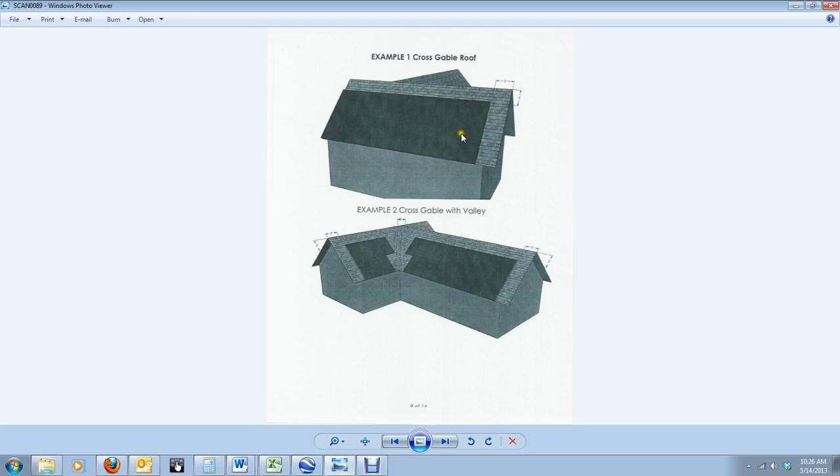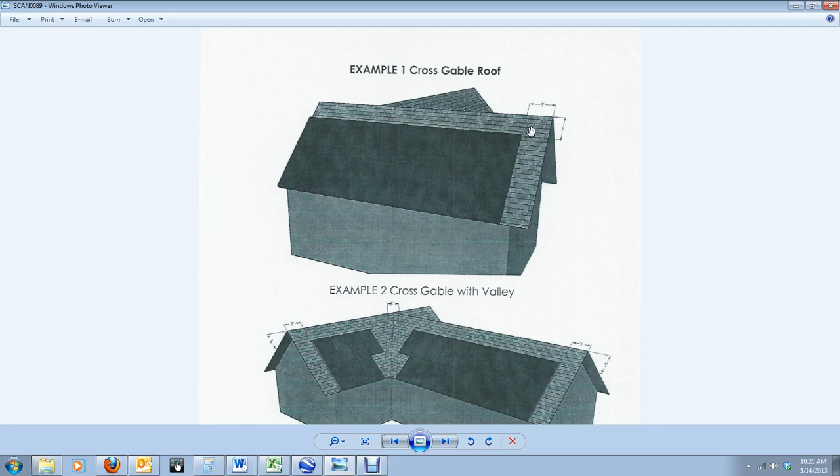My next step is to make sure that I'm not in a city that has fire code. I know from experience that Temecula enforces fire code. So fire code issues have to do with being able to place modules in a certain area. So fire code for particular roofs looks like this. So if you were to do a cross gable roof, we need to stay 3 feet away from the ridge and 3 feet away from the eave line. On a cross gable valley roof, I need to stay 3 feet total from this valley.

So if I go back to Google Earth, this roof right here, I need to stay 3 feet from the ridge, and I need to stay 3 feet from one of these eaves. So I need to deduct 3 feet from my ridge number and 3 feet from my eave number. So I'm going to go back to this sheet, and I did this on purpose so that you could see that there was 39 modules that I could have placed on this roof, and if I didn't look into the fire code issue, I would have oversized the system and eventually ended up re-signing this homeowner.

So I'm going to deduct 3 feet from that. I'm also going to take 3 feet from this number. So now I'm at 43 feet times 14. So 43 times 14 equals 602. I'm going to go 602, and I'm going to divide that by 20. So now I'm at 30 modules. So if I would have not done my homework, I would have actually placed 9 more modules on that roof, and it would have never fit. And it would have never passed plan check, and eventually would have never got installed on the roof. So 30 modules on that west facing roof.

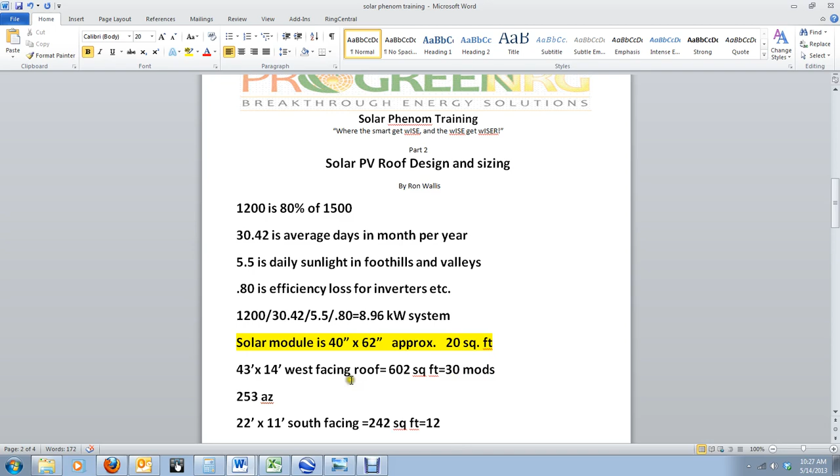Now I'm going to go to the other roof, and I'm going to actually take 3 feet off that number. I'm going to take 1.5 feet off this number right here, because I need to be 3 feet total and not in the valley with my solar modules. So 1.5 feet this way on this roof and 1.5 feet this way. So 4.5 feet there, 3 feet over here, so minus 4.5 feet going this way and minus 3 feet this way.

So I'm going to go back to my sheet and I'm going to say this needs to be 22 minus 4.5 feet is 17.5. And this from my ridge down to my eave was minus 3, so that's 8. So now I'm back to my calculator. So it's 17.5 times 8 equals 140. So I just took 100 square feet off.

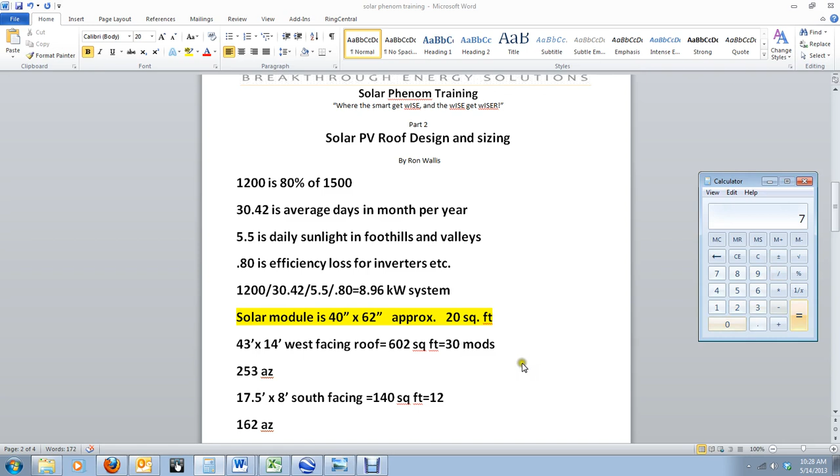So 140 divided by 20. So now I went from 12 modules to 7. So I can fit a total of 30 on the west facing roof, 7 on the south facing roof. So I'm at a total of 37 modules times 250 watt modules. 37 times 250, I'm at a 9.25 system.

9.25 system. I'm over the 8.96, which is what I figured out that I needed to offset their utility bill by 80%. So this looks good. I can fit 30 modules on the west facing roof, 7 on the south facing roof, for a total of 37 modules, 250 watts for a 9.25 kW system.

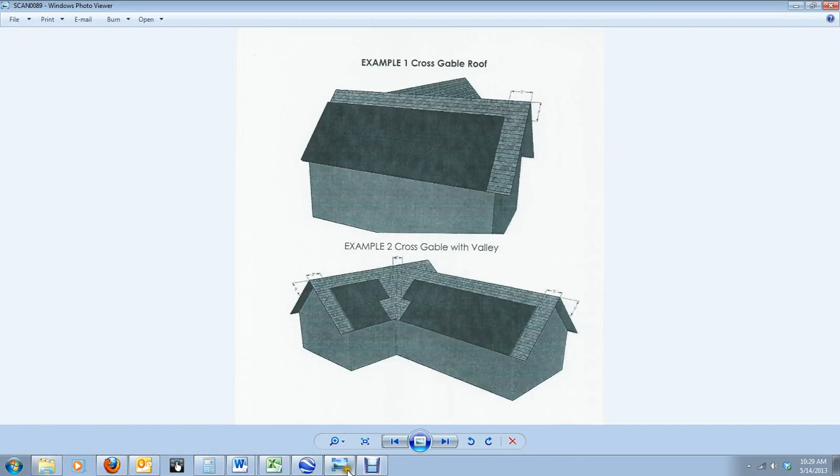My next step is to figure out what my tilt is. And a tilt is what the angle and the degree of the roof is. Can I figure that out through Google Earth? Absolutely not. But I know that 90% of the houses in California either have a 4/12 pitch roof or a 5/12 pitch roof, which is either 18 degrees or 22 degrees.

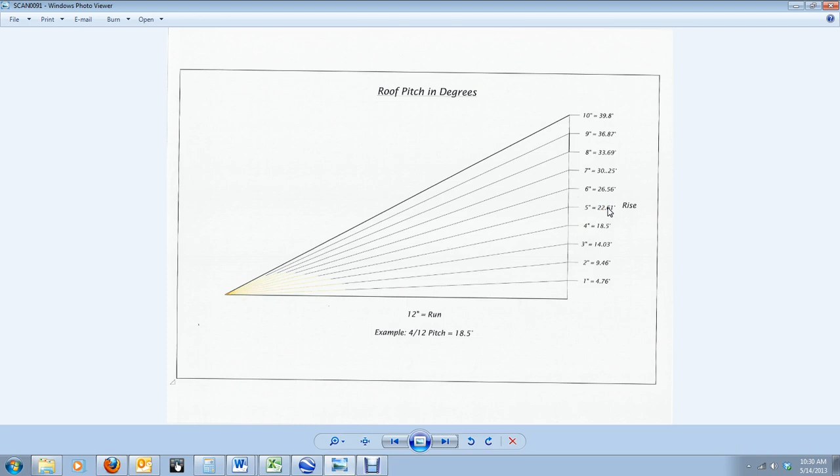So if I go to Google Earth and I click this little guy right here, I'm going to hold my mouse down and I'm going to drag it, and it's going to take me down to a street view of these homes. And I'm going to be able to actually scroll through and look at this house.

Internet's a little slow today.

So if I look at this roof right here, I know that this roof right here is the typical 4/12 or 5/12 pitch roof. So now I'm going to go back to this spreadsheet right here. I'm going to put my array azimuth and tilt. So I have a west facing roof at 253. So 253 is my azimuth, and my tilt is 22 degrees.

On my other roof, I'm at 162 azimuth, and my tilt is 22 degrees. The size of that system was 30 modules, 30 times 250. So I have a 7.5 system on one roof, 7.5. Number of modules was 30. The type and the inverters I'm going to figure out later when we get to stringing.

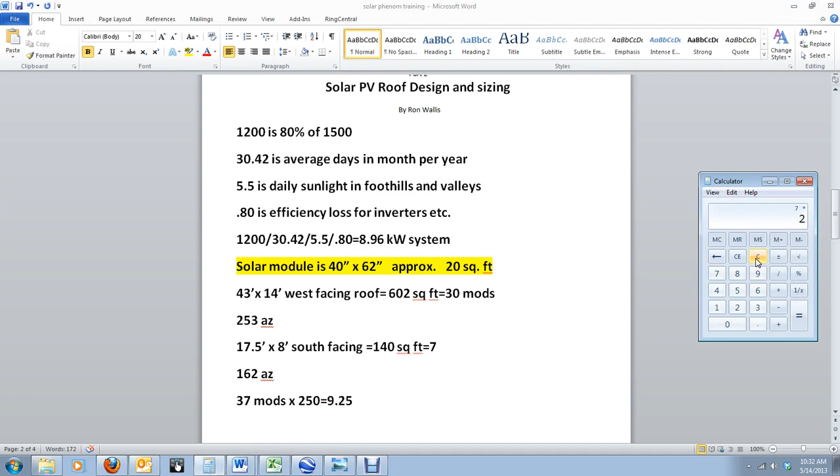This roof right here, my south facing roof, was 7 modules. So 7 times 250 is a 1.75 system. 1.75 system for a total of 7 modules. So now I have array 1 with my azimuth and my tilt, array 2 with my azimuth and my tilt, the size and the kilowatts of that roof, how many modules on each roof.

Can I fill out any information on my form? Absolutely. So additional system info, long wire run. Can I see if this is a long wire run? I'm going to exit Street View. This is going to take me back to the top view of this home.

The internet is very, very slow today, so we're just going to go back to this.

So my long wire run is normally when it's over 150 feet. I need to be able to account for that, especially in my pricer. We'll go over that later when we get to electrical issues. Homeowner needs to choose whether or not they want an attic conduit run, which means no exposed conduit. I know it's not a ground mount system, so I'm going to put no.

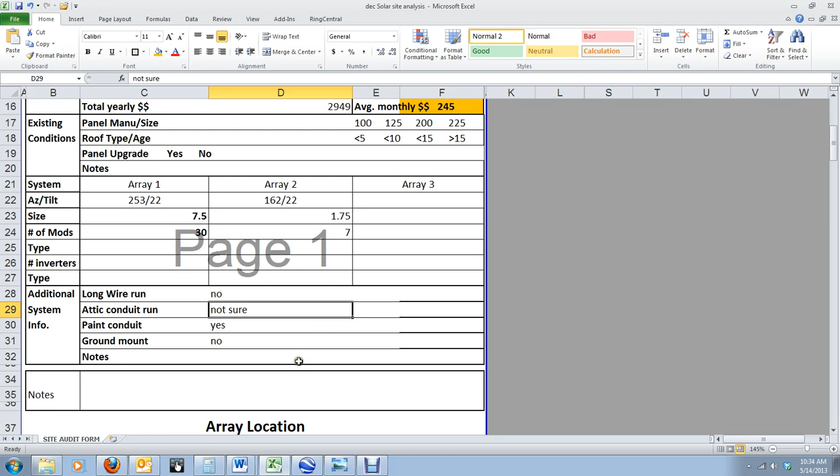Any notes? We always paint our conduit, which is the conduit going up the side of the house. Attic conduit run, not sure. This is up to the homeowner if they want an attic conduit run. And then the long wire run, I'm going to say no because I know it's not over 150 feet. Well, that's it for roof design.